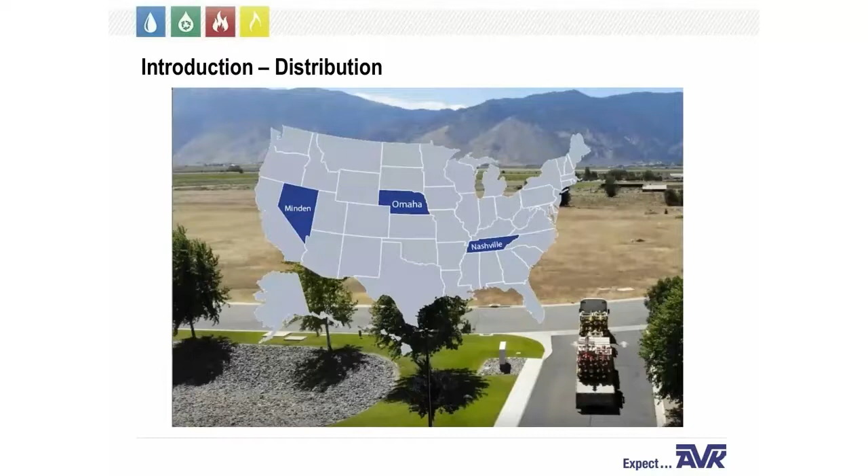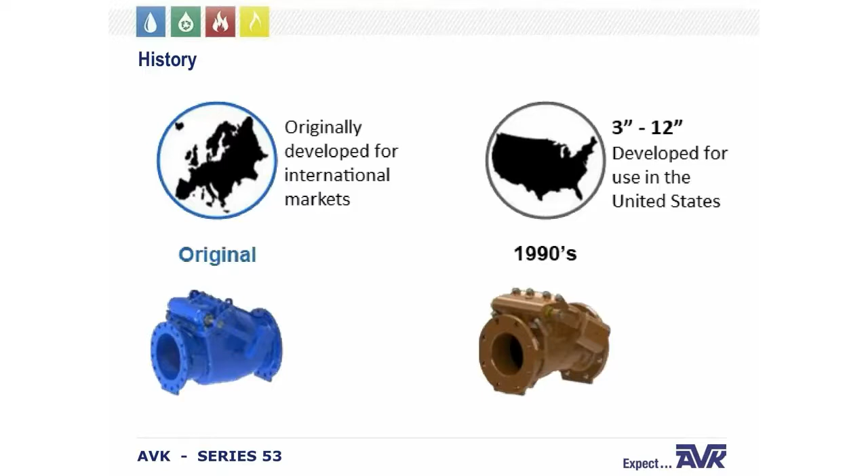All right, so let's start with the Series 53 swing check valve. The AVK Series 53 swing check was originally developed for international markets. In the 1990s, the 3-inch through 12-inch sizes were developed for the U.S. market, and American AVK began selling the Series 53 here in the U.S. The main function of a swing check valve is to prevent return flow by closing when the flow through a water line stops or reverses.

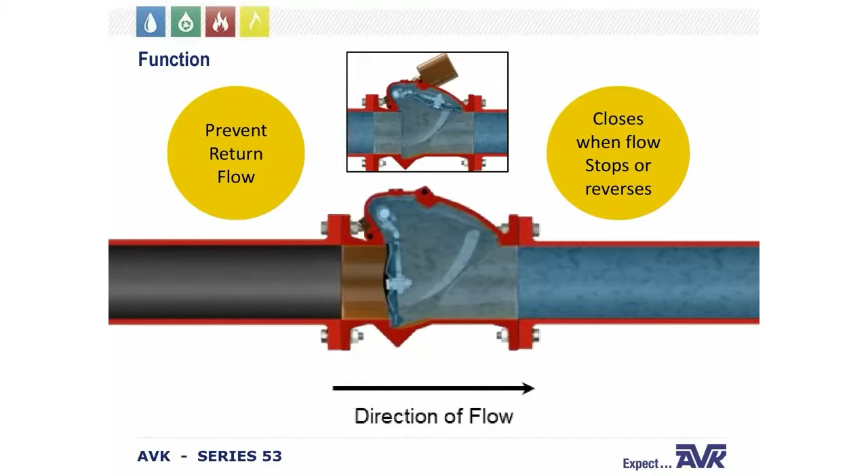Additionally, check valves with lever and springs or lever and weight provide a clear visual indicator to the operator that there is flow going through that pipeline. The lever is up when it is flowing and down when it is not.

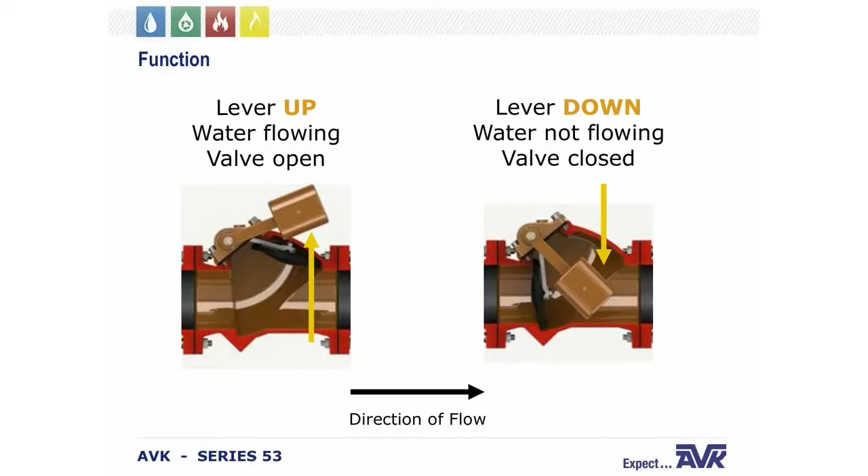As with all AVK products, the Series 53 check valve meets and exceeds requirements of AWWA. C508 is the standard for swing check valves for waterworks service. And of course, the interior and exterior coatings meet and exceed AWWA C550. Our check valves are certified to NSF 61 for the health effects of drinking water and to NSF 372 for their low lead content.

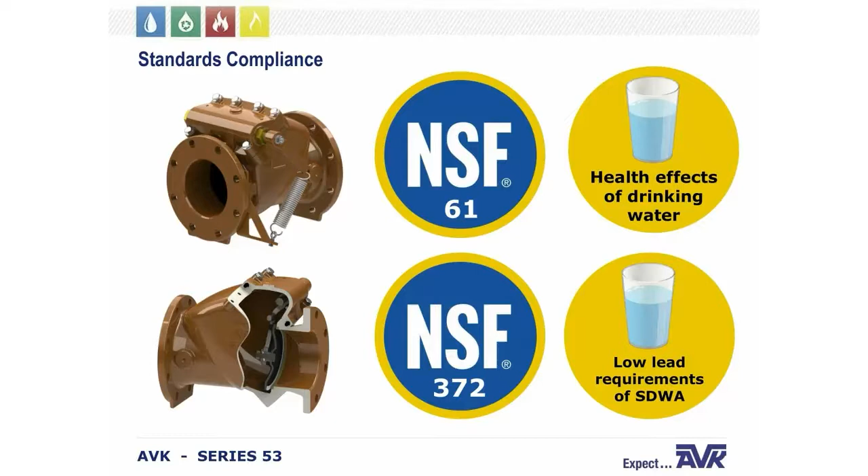So as I mentioned, C508 requires that a valve be tested to ensure quality. So at AVK, the first thing we do, we shell test 2 times the rated pressure, and the seat test is done at rated pressure, which is 250 PSI. In order to ensure the longevity and dependability of our Series 53, it has been proof of design cycle tested to 1 million cycles.

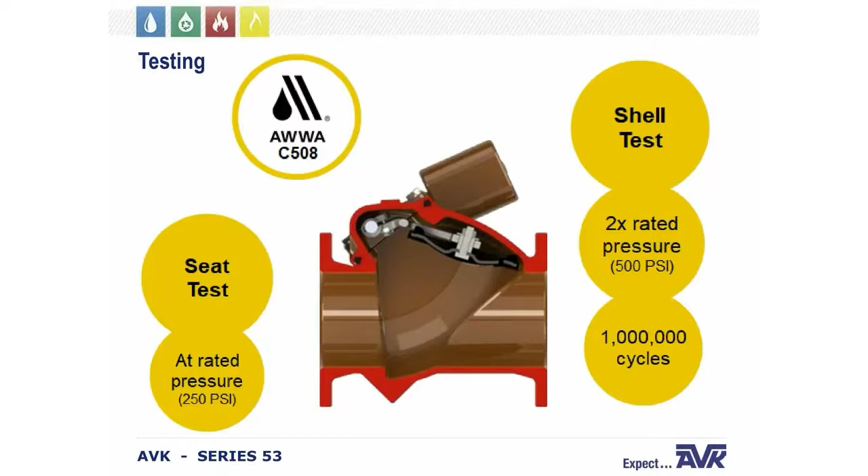We have 2 different seating options for this valve. The most common is the resilient seat, which seats against epoxy-coated ductile iron in the valve body. And we also have a resilient seat that goes against a bronze ring.

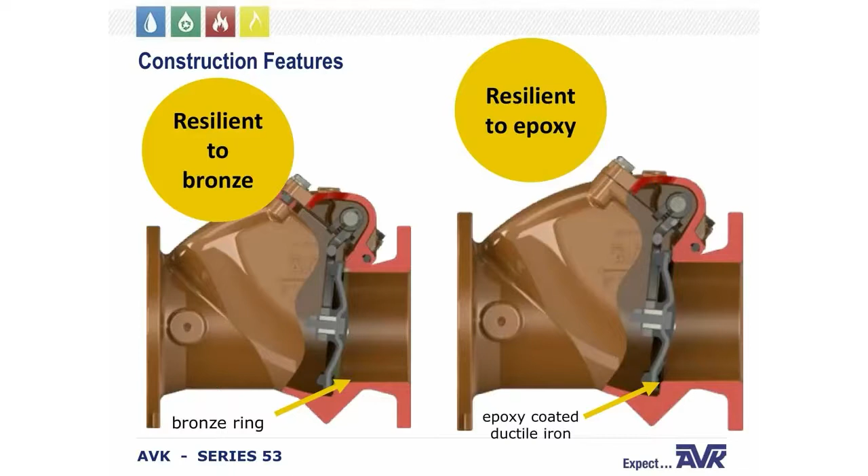There are several different actuation options for the Series 53 check valve. There is the no lever, which is also called the swing version or plain version. There is a lever and weight, lever and spring, and dual lever and weight, where there's a lever on both sides. For the lever and weight or lever and spring valves, the lever can be on the right or left side of the valve when you're looking downstream.

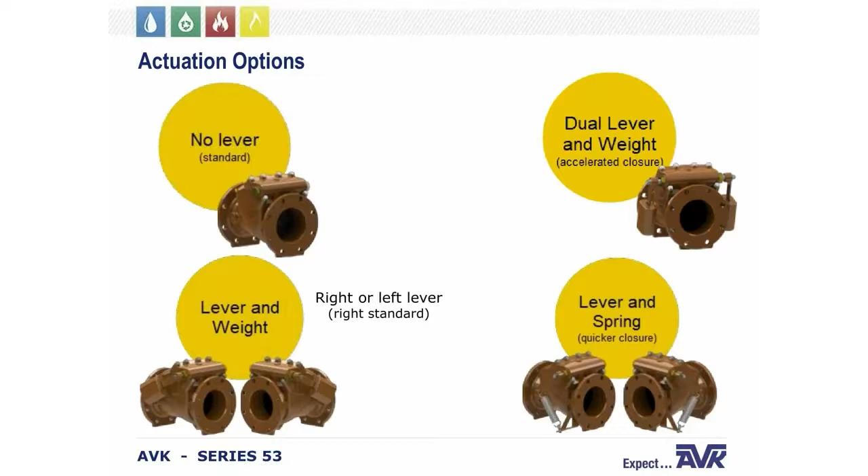AVK can also provide pre-drilled bosses on each check valve for bypasses and pressure taps. There are 5 bosses on each valve. There's 4 on the body, located upstream and downstream of the seat, and there's 1 in the bonnet.

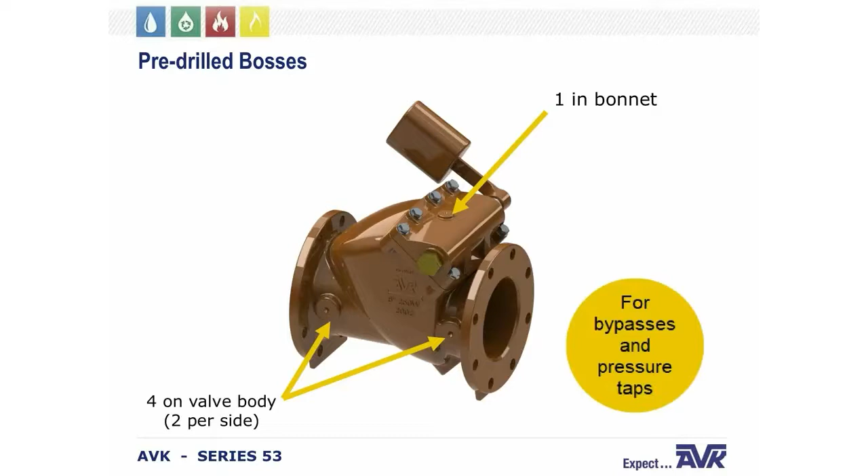AVK Series 53 is a product range of 3-inch through 12-inch. It's available with flange by flange end connections through the full range of the valve. The standard drilling pattern is the ANSI B16.1 Class 125. International flanges are also available for customers who might have imported equipment.

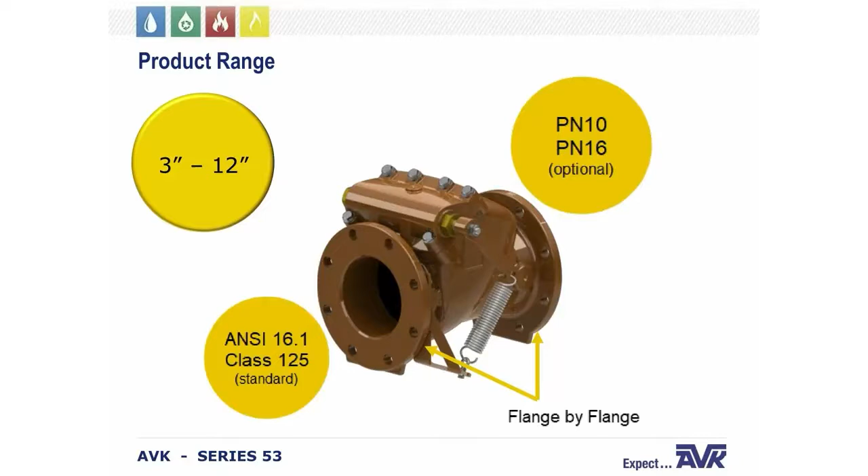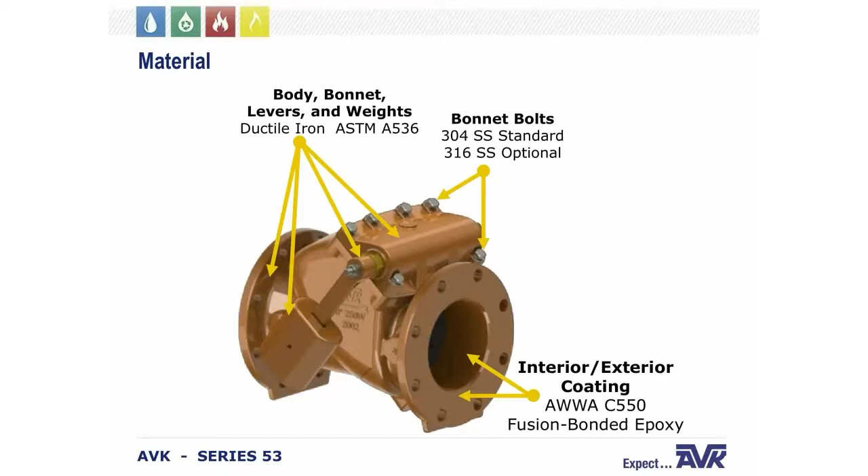All right, let's cover some of the technical info. First, look at the materials. The body, bonnet, levers and weights are ductile iron to ASTM A536 standards. The coating meets AWWA C550. It's fusion bonded epoxy. Bonnet bolts are 304 stainless steel and 316 is optional. The bonnet gasket is EPDM and encompasses the bonnet bolts, helping to protect the bolt threads from the interior and the exterior environment. Our next slide is going to show a little bit more on that.

Also, the O-rings are NBR. The shaft and the hinge are 316 stainless. The shaft bushings are bronze, and the internal hardware is 316 stainless steel standard. Our disc is encapsulated with EPDM for drinking water applications. We do not have NBR rubber available.

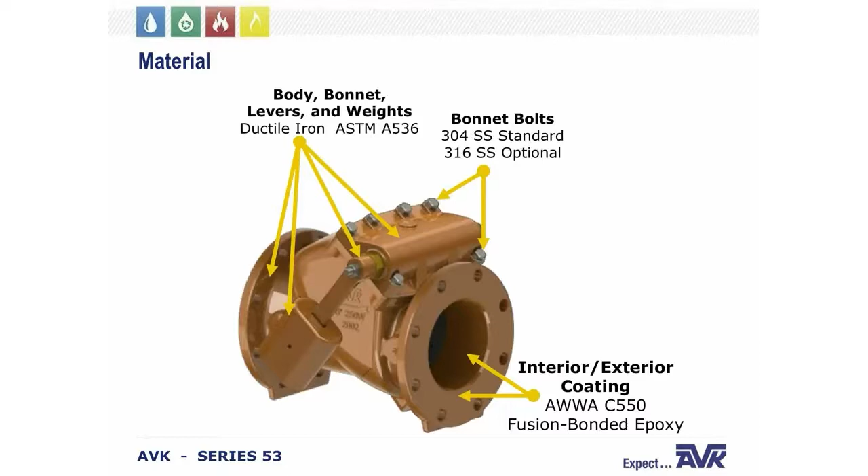This picture shows the internals of the valve. You can see the bonnet gasket and the way that it fits around each individual bolt to help protect it from corrosion. You can also see our shaft and hinge, which are the 316 stainless steel. Our shaft bushings are bronze and internal hardware stainless steel.

The shaft and the bonnet design also makes repairing and rebuilding the Series 53 much easier, as the complete head assembly can be quickly swapped out and replaced. Or the end user's got the option of rebuilding the old head unit and storing it as a backup if they install a new valve.

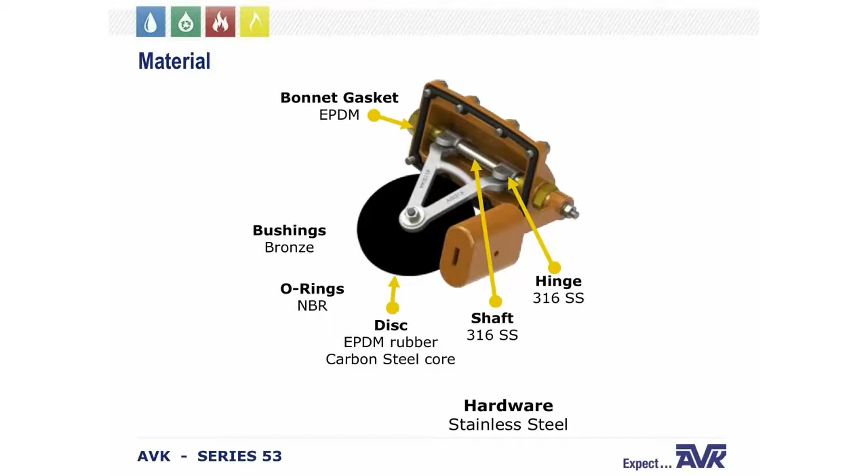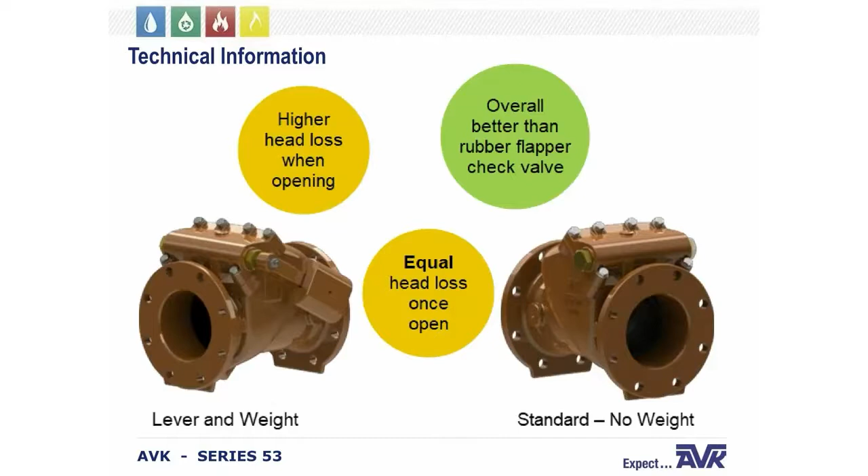Overall, the AVK Series 53 is more efficient and offers more energy savings in pumping applications than a rubber flapper check valve would. And this is because of the way that our valve is designed to open, as our next slide is going to show.

So a key feature is that it's very easy to repair. The entire bonnet assembly with all of the internal parts can be lifted out, and a replacement bonnet can be installed with little downtime and without removing the valve from the line.

Series 53 has a clear waterway design. With the clear waterway design, the disc in the full open position is fully clear of the waterway, so that there is no obstruction in the flow path. By comparison, rubber flapper valves are a full waterway design, and with the full waterway design, the disc in the full open position is not clear of the waterway, which can increase head loss.

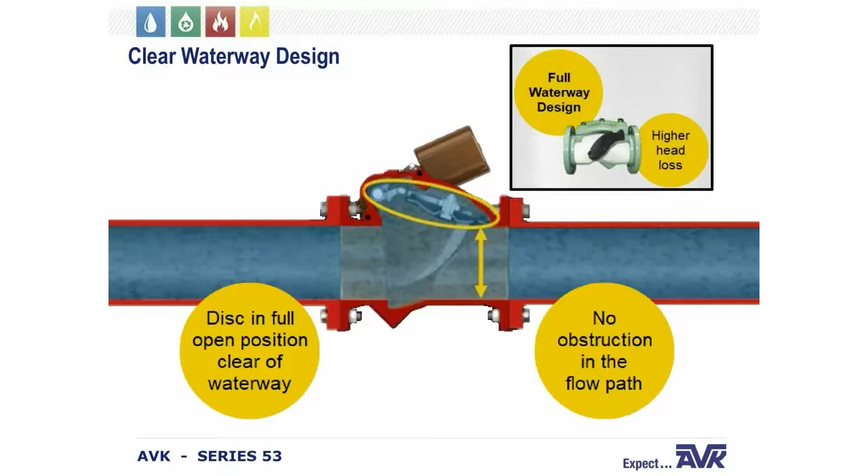The AVK Series 41 is pressure rated to 250 psi. It also maintains the standard B16.10 lay length from flange to flange and obtains the performance desired of the clear waterway design. The AVK Series 41 achieves this by mounting the shaft in the bonnet as opposed to the body of the valve. It's important to note that check valves come in two lay lengths.

There is the standard and the shorter B16.10, which is what our Series 41 meets. The longer clear waterway option is defined in more detail in C508. AVK's design eliminates the need for two lay length options and eliminates the sacrifice of performance of the shorter lay length as specified. However, if you are replacing an existing valve in a line that is not B16.10, you would need a spool piece to make that connection.

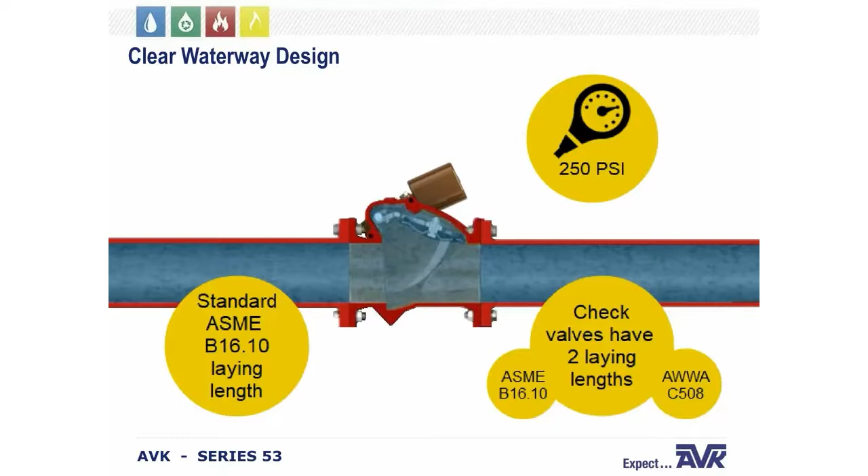So water hammer is caused when flow in a water line suddenly stops. This causes a pressure wave to travel down that pipeline at the speed of sound. And this shock wave traveling down the pipeline is the hammering sound that is heard when a check valve suddenly closes shut. So to prevent water hammer, there are two things that can be done. One is you can close the valve quickly so that the water flow does not have time to reverse. Or two, you can close the valve slowly so the water flow is gradually shut off.

To close the valve quickly, AVK provides levers and adjustable weights or levers and adjustable springs to ensure that the valve will close before flow reversal can occur. The seating angle is also tilted 15 degrees, which helps the disc close quickly and ensures that the disc stays on the seat and there's no differential pressure on either side of the disc.

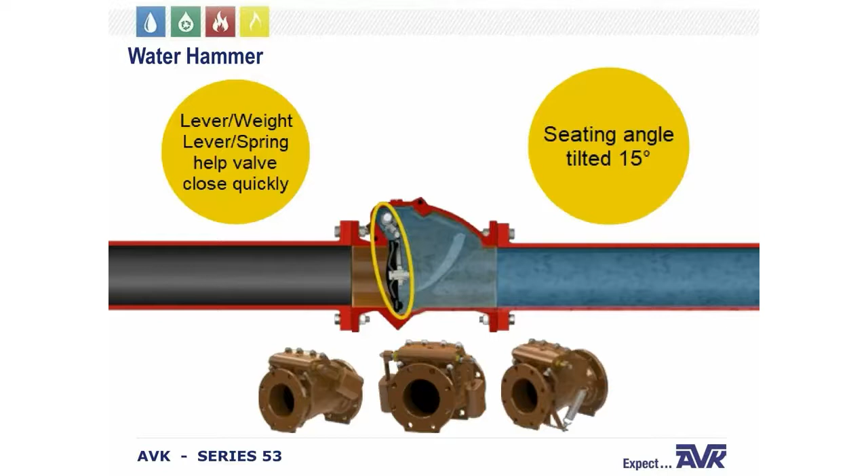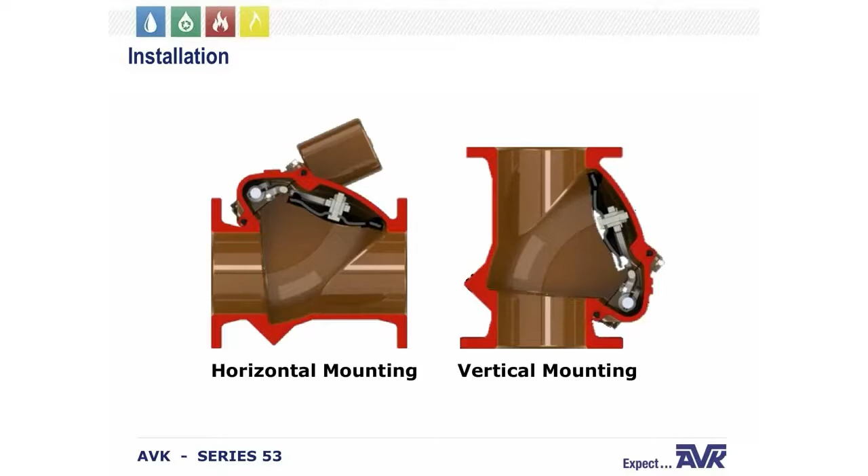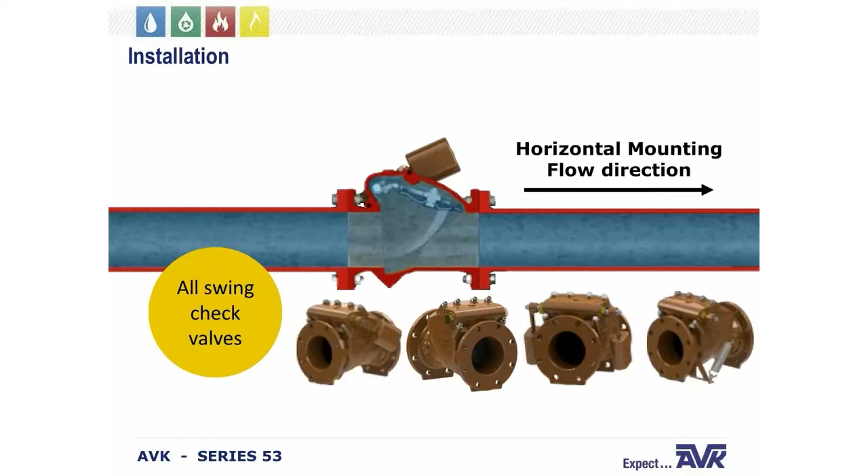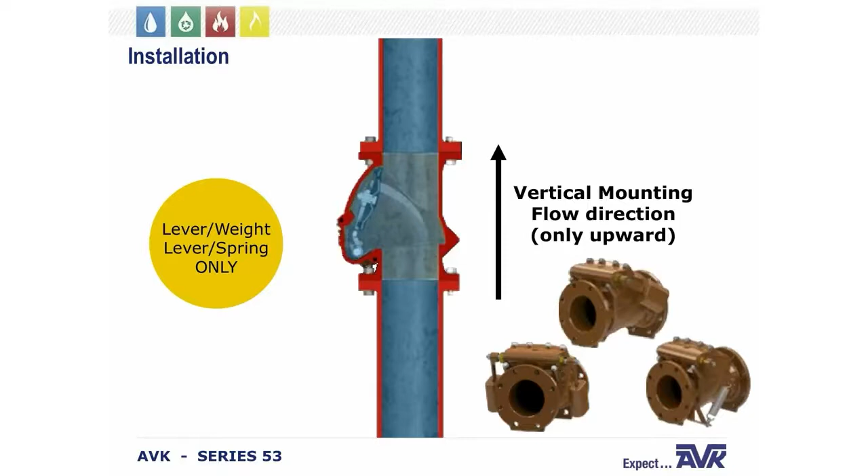The AVK Series 41 swing check can be mounted horizontally or vertically. When mounting horizontally, the full product range of valves can be used. However, if you're doing a vertical installation, only the lever and weight or lever and spring valves can be used. And vertical mounting can only be used with upwards flow. Also, to help make installation easier with either positioning, the flow arrow cast into the valve body must be pointed in the direction of flow during normal system operation.

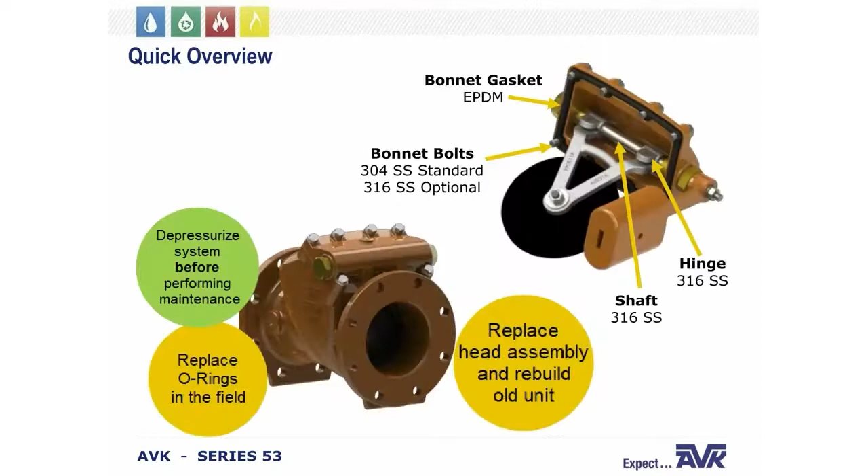And just a quick recap over all that info on the 41. The Series 41 is designed with stainless steel shaft, hinge, bolts, and a unique heavy-duty bonnet gasket design. When properly specified for the intended application, the wear and tear on the AVK Series 41 is limited to just a few O-rings. An O-ring replacement can be achieved by working on the existing head assembly in the field or by quickly installing a new head assembly and rebuilding the old unit back at your shop. And also, just as a safety note, please remember that all maintenance should be performed on a depressurized system to avoid injuries.

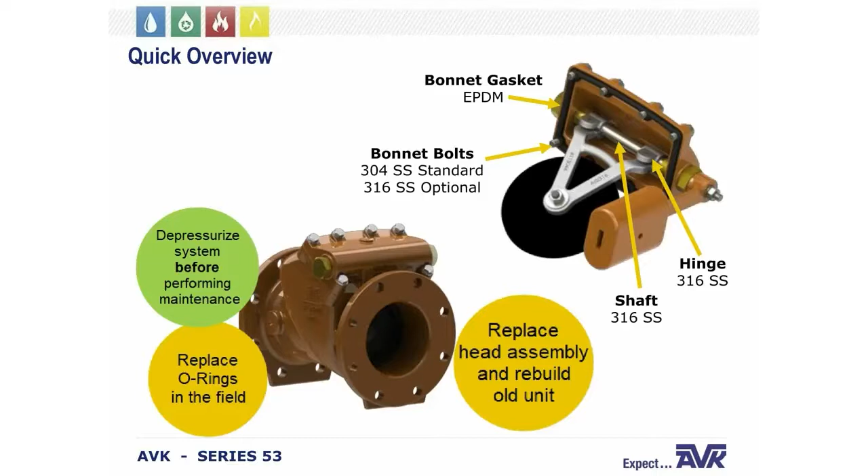All right, that covers it for the 41. Now I'll introduce our Series 53 check valve. So we'll start in on it. AVK Worldwide has two different versions of the ball check valve. The first was developed by AVK for international markets. This Series 53 ball check is equipped with ISO flanges.

The second was developed by Hillen de Lelie, or HDL, in the Netherlands. This ball check valve, known as the HDL 5087, is equipped with ANSI flanges. In 2006, AVK purchased HDL and renamed the HDL 5087 to our Series 53. In the United States, we use the Series 53 valve developed by HDL, which some of our customers still refer to as the HDL 5087.

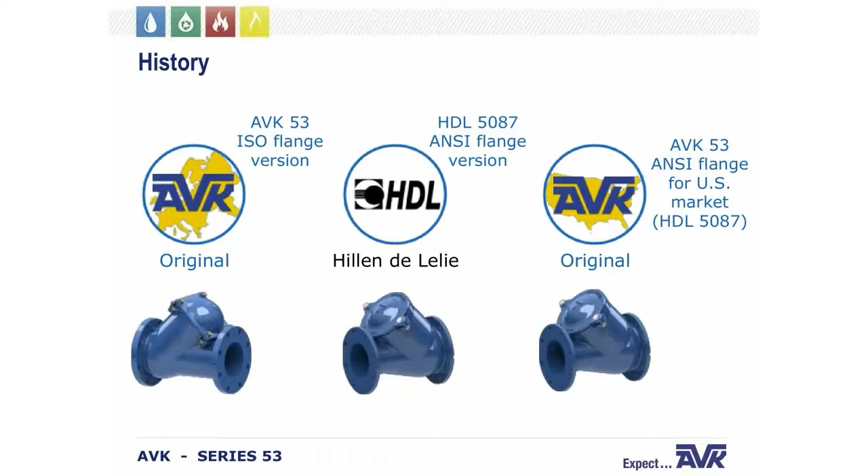So the main function of a ball check valve is to prevent return flow by closing when the flow through a water line stops or reverses. The Series 53 ball check valve is used for industrial and municipal backflow protection. A simple and cost-effective design is an ideal solution to liquids containing high solids contents.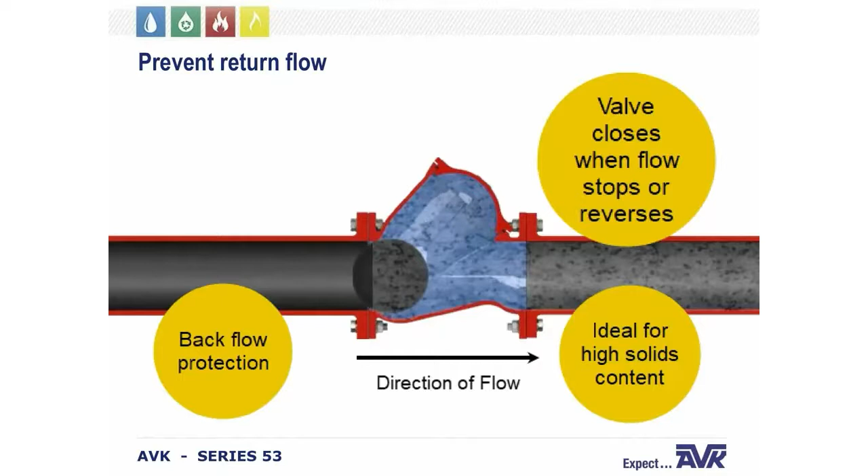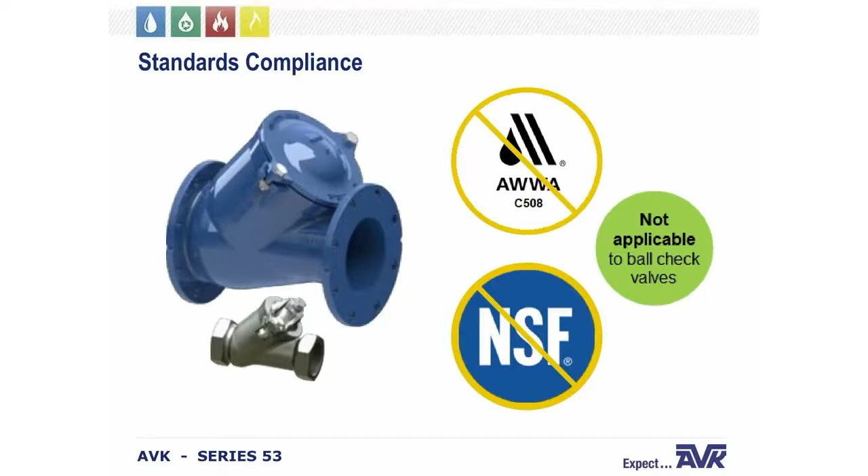There are no AWWA standards for the Series 53. C508 does not apply to ball check valves, and as these valves are primarily used for wastewater and raw water, they're not certified to NSF 61 or NSF 372. However, the coatings meet or exceed requirements of C550, and as with all AVK products, they are manufactured in our ISO 9001 14001 facility.

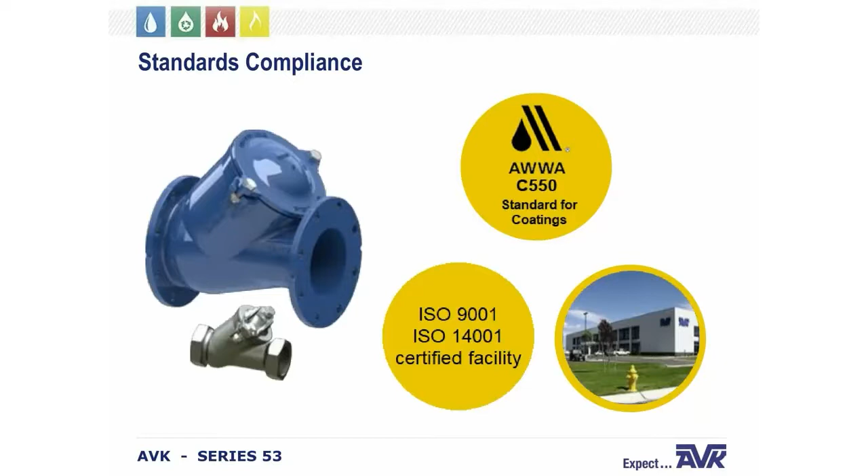So each valve is pressure tested at production. We shell test our Series 53 at 1.5 times the rated pressure, and the seat test is done at rated pressure, which is 150 psi.

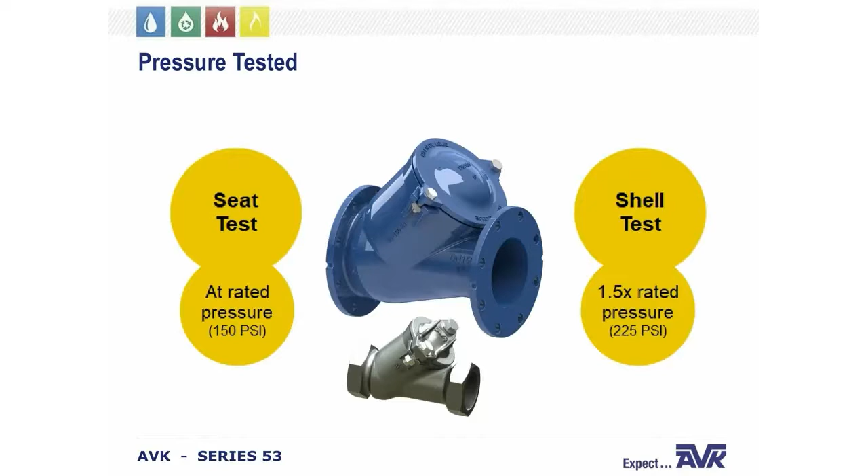Just like our Series 41, our Series 53 is very easy to repair. The bonnet can be removed and the ball lifted out and replaced with very little downtime and without removing the valve from the line. However, for larger check valves, the ball can be quite heavy. One way to lift the ball out is to drill a hole in the ball and insert an eye bolt and then lift it out with a lifting device.

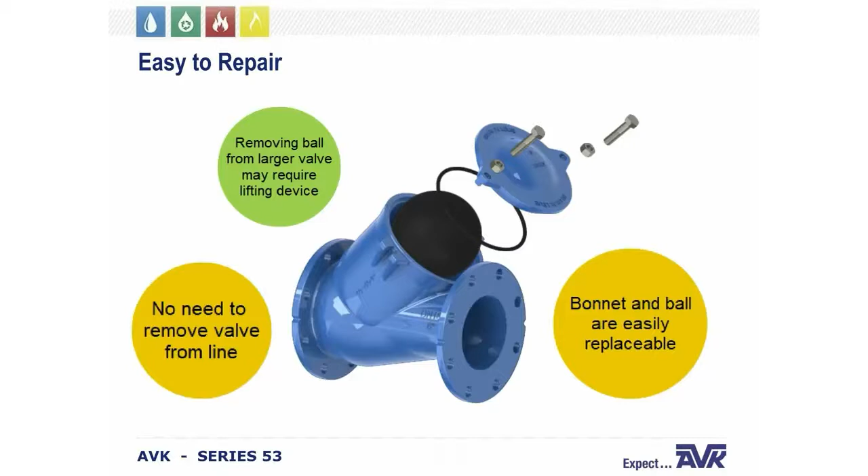When the valve is in operation, the ball rotates, so when it seats, it's on a different area of the ball almost every time. This random seating of the ball on closing ensures long life of the valve.

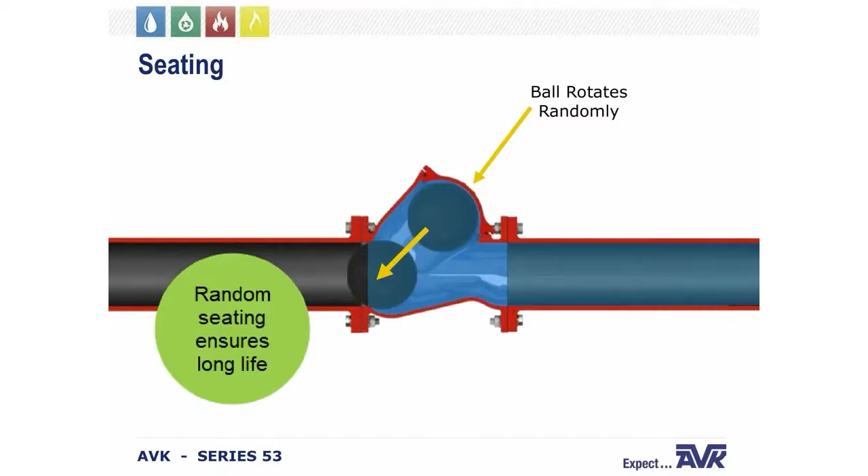There are no actuation options for the Series 53. It's a very simple valve. The ball is the only moving part. However, we do have balls that will float or sink, and we'll discuss those here in a moment.

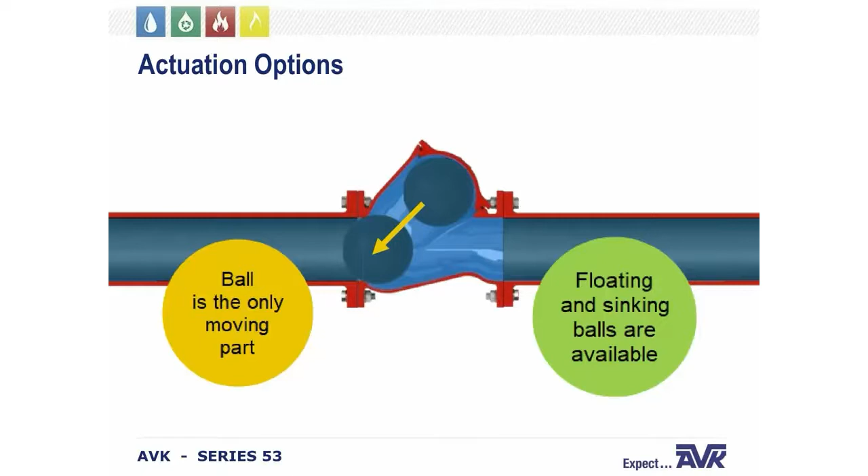First, we'll go to the product range. It has a range of 1.5 inch through 24 inches. NPT end connections are available in 1.5 inch and 2 inch sizes. Flanged end connections are also available in 2 inch through 16 inch and 20 inch through 24 inch sizes. There is not an 18 inch Series 53 valve.

The standard drilling pattern is the ANSI B16.42 for Class 150, and these valves are also available with ISO flanges and BSP threads for customers who might have imported equipment.

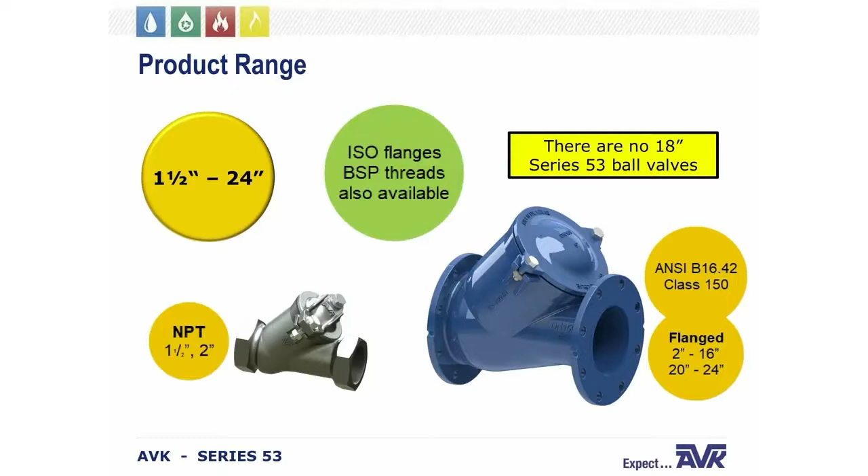Here's a breakdown of the materials for the Series 53 ball check valve with flanged ends. The body and the bonnet are ductile iron to ASTM A536. The interior and exterior meet AWWA C550. It is fusion bonded epoxy. We also have a black primer available as an option.

On the 1.5 inch through 14 inch and the 20 inch check valves, the ball is an aluminum core encapsulated with NBR. Polyurethane is also an option. However, for the 16 inch and the 24 inch check valves, the only ball material is an aluminum ball encapsulated with polyurethane. The bonnet gasket is NBR, and the bonnet bolts and nuts are zinc plated steel with 304 and 316 as options. Note that on our international version, the ball is steel or ductile iron, depending on the valve size.

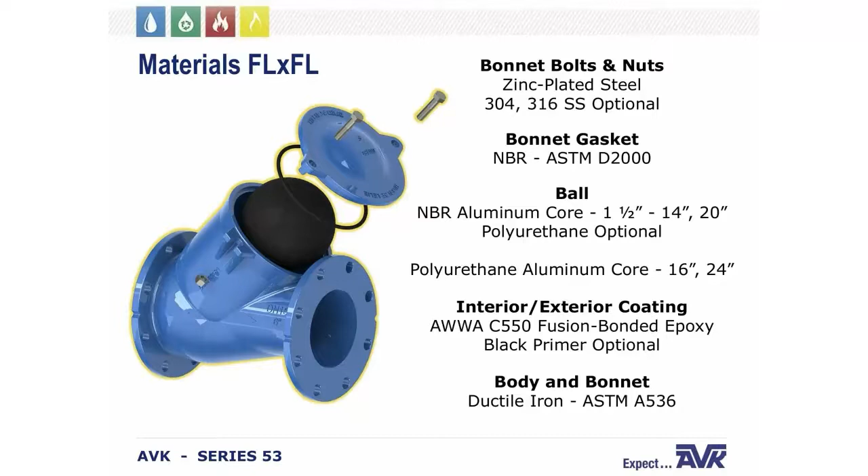If you're needing smaller diameters, there are two versions of the Series 53 ball check valve with NPT end connections. One with a stainless steel body and a second with a ductile iron body coated in fusion bonded epoxy. In both versions, the ball is a steel core encapsulated with NBR. Polyurethane is also optional. Our bonnet gasket is NBR, and the bonnet bolts, washers, and bonnet nuts are 304 stainless steel with 316 optional.

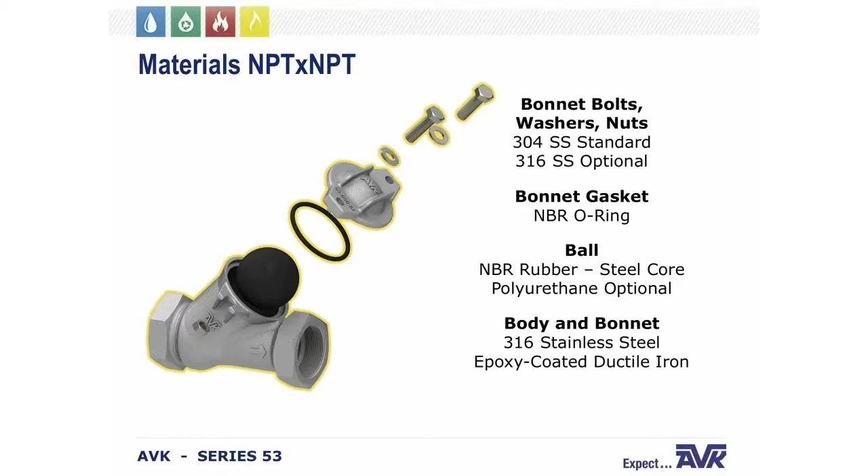So in addition, the Series 53 has a full waterway design. With a full waterway design, the flow area is maintained, but the waterway may change its shape slightly to allow for a small part of the ball to be in the waterway.

The AVK Series 53 check valve is pressure rated to 150 psi, and it maintains the standard B16.10 lay length from flange to flange, which is the same lay length as our Series 41. So in that sense, our Series 41 and our Series 53 are interchangeable.

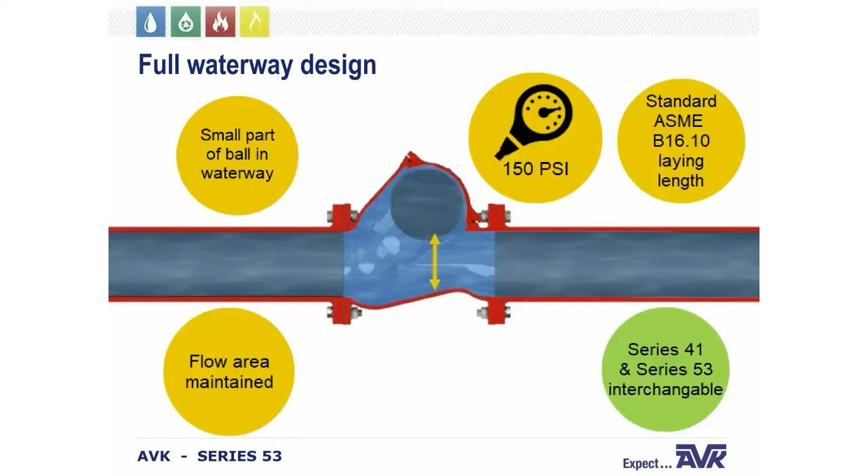So water hammer, as we discussed a little bit earlier, is whenever the flow in a line is suddenly shut off, and the pressure wave travels down at the speed of sound. Our Series 53 is not particularly well suited to solve water hammer problems. If water hammer is a problem, the AVK Series 41 swing check valve should be recommended.

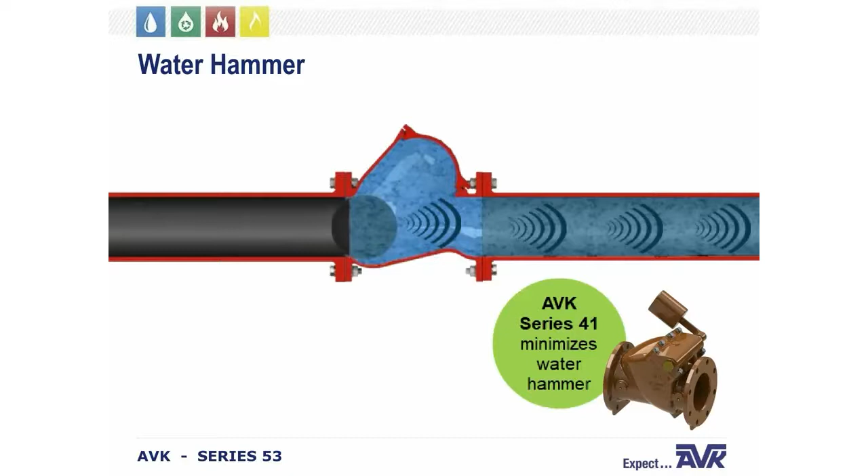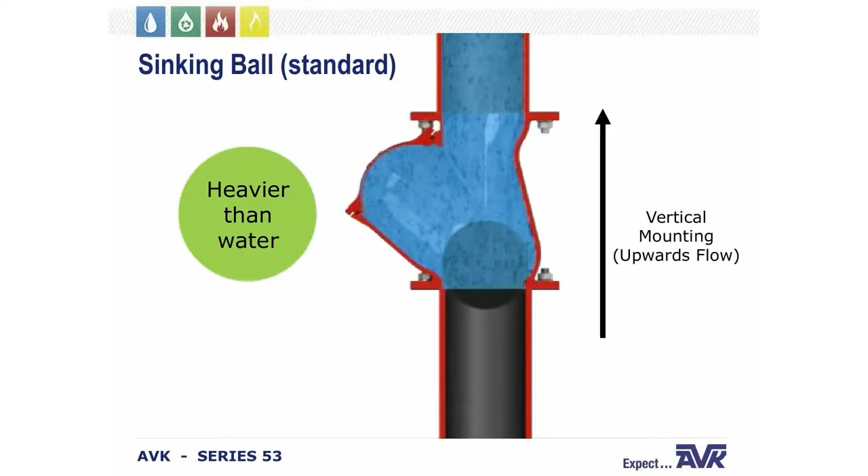The Series 53 can be provided with a ball that either sinks or floats. The floating ball is provided so that a check valve can be installed vertically with the flow going down. This is a very unusual installation and is seldom done, but it is available as an option. And for the floating ball, the way that works is it's less dense than the water, making it float up, versus the sinking ball, which is more dense and goes down.

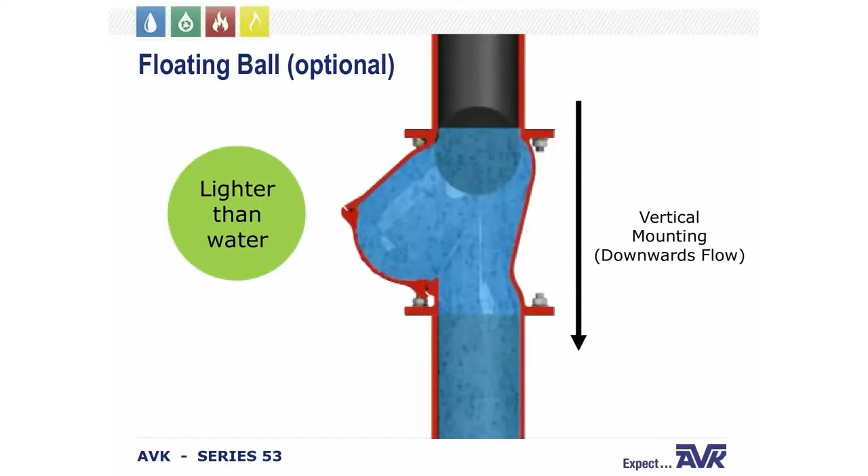The Series 53 ball check valve can be mounted vertically or horizontally. The preferred installation for best performance is vertical with the flow going up. When mounting vertically with the flow going down, a floating ball must be used. When mounting horizontally, there is a minimum static head back pressure requirement of 10 feet for effective operation. The recommended flow velocity is around 5 feet per second, and the ball should move freely through the valve body.

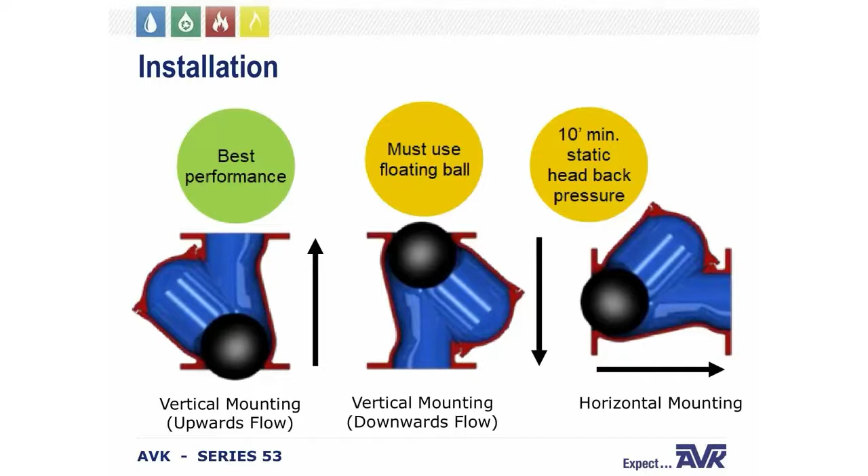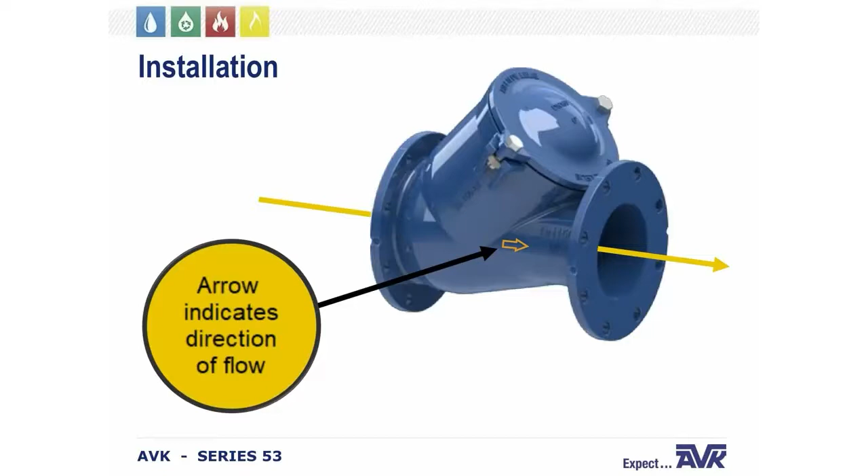Whether mounted vertically or horizontally, the flow arrow cast in the valve body must be pointed in the direction of flow during normal system operation. AVK Series 53 requires no scheduled lubrication or maintenance. The valve can be serviced or inspected without removal of the valve from the line. But note that all installation and maintenance must be performed on a depressurized system to avoid injuries.